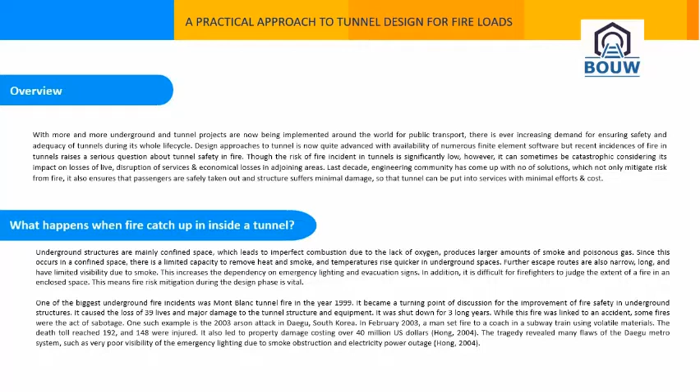The tragedy revealed many flaws of the Daegu metro system, such as very poor visibility of the emergency lighting due to smoke obstruction and electricity power outage (Hong, 2004).

Behavior of concrete under fire. The behavior of concrete under fire exposure is determined by the properties of the aggregates and the cement matrix, its moisture content, pore structure, and loading, in addition to the rate of heating and maximum temperature attained. When heat penetrates concrete, it results in desorption of moisture in the outer layer.

Most of the water vapor formed will flow towards the cold interior of the concrete and be reabsorbed in the voids. As this process continues with heating and once the saturated layer cannot move fast enough through the pore structure, it is overtaken by the advancing heat front, which causes the water to evaporate at the interface, and due to the rapid rise in temperature and the restrained expansion, the vapor pressure rises rapidly.

When the pressure starts pushing outer layers, spalling of concrete happens. The reason behind this spalling can be attributed to the tensile strength of concrete subjected to vapor pressure exerted on the concrete. It is observed that concrete with high strength and low permeability is more prone to this mode of failure, particularly if it has a high internal moisture content.

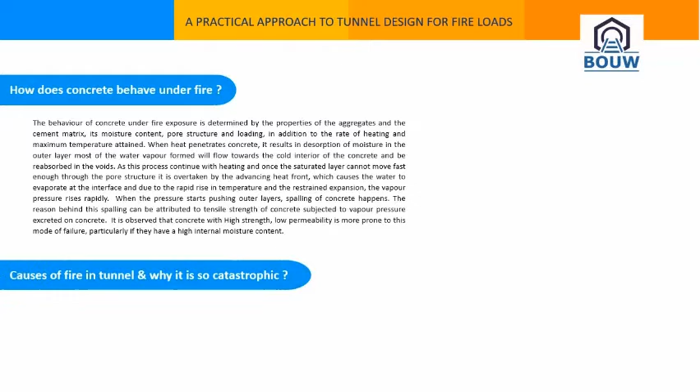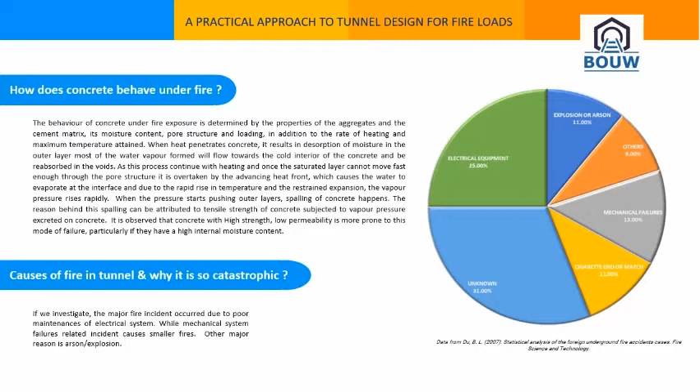Causes of fire in tunnels. If we investigate, the major fire incidents occurred due to poor maintenance of electrical systems, while mechanical system failure related incidents cause smaller fires. Another major reason is arson/explosion. Data from Du, B. L., 2007, Statistical analysis of the foreign underground fire accident cases, Fire Science and Technology. Breakthrough in design.

In the last decade worldwide, the engineering community has made significant achievements in developing advanced and sophisticated liner design along with reliable fireproofing systems and use of artificial intelligence. At the onset, the whole activity was targeted to provide passengers with safe, smoke-free egress/escape tunnels, thus reducing loss of lives, and ensuring that the structure can still withstand major service loads during and after a fire.

Better quality control to minimize explosive concrete spalling and detrimental impacts of fires to the tunnel main structural components. Ensure that any damage is reparable, so the facility can return to normal operations as rapidly as possible, thus minimizing economic impacts. Application of AI to develop systems which can detect fire early in real time and reduce response time, ensuring safety and reducing losses of both lives and economy.

The minimum legislative level of safety for structural fire design aims to provide an acceptable risk associated with the safety of tunnel, firefighters, and people in the proximity of it. It is the owner's acceptable risk depending on tunnel size, clearance envelope, provisions for facility systems, supporting equipment, emergency egress layout, as well as the entire adopted emergency egress scenario. All will be determined based on the initial classification of the facility.

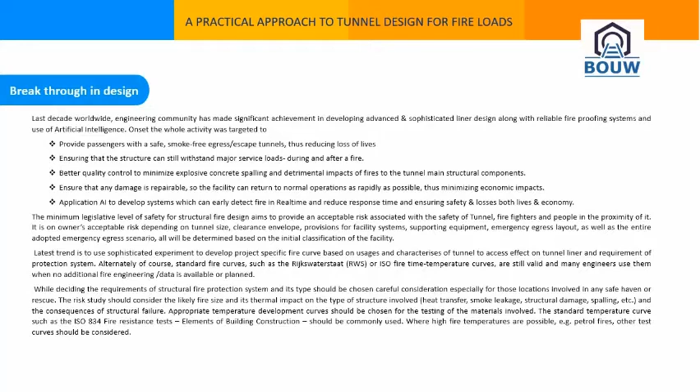Appropriate temperature development curves should be chosen for the testing of the materials involved. The standard temperature curve such as the ISO 834 fire resistance tests on elements of building construction should be commonly used. Where high fire temperatures are possible, e.g. petrol fires, other test curves should be considered. Choosing appropriate fire time temperature curves.

Recent trends in large projects are to carry out project-specific assessment. Customized fire curves are gradually considered as the industry norm, with an increased focus on an actual fire event that a tunnel should be designed for, based on the type of vehicles and their combustibles that are allowed into the tunnel, like rail/metro or roads. As there are differences in causing fire, either by combustion or electrical or any other reasons. Once we identify the exposure and risk associated, a customized curve provides the best fire loads the tunnel shall be designed for.

Now, Eurocodes provide advanced calculation methods and guidance, and using performance-based engineering allows for a more prudent approach to fire protection, which is generally based on detailed quantitative and qualitative risk assessment for a fire event in a tunnel. The EUREKA-curve proposed a number of fire time temperature curves for a variety of applications, ranging from the ISO 834, 1975, cellulosic curve to the RWS curve, figure.

The selection of an appropriate time temperature curve and the relevant fire duration is an important consideration, which should be driven by a risk assessment, in cases where no design standards apply. Once a suitable fire time temperature curve has been selected, the likely effects of such a fire on the tunnel's structure should be ascertained.

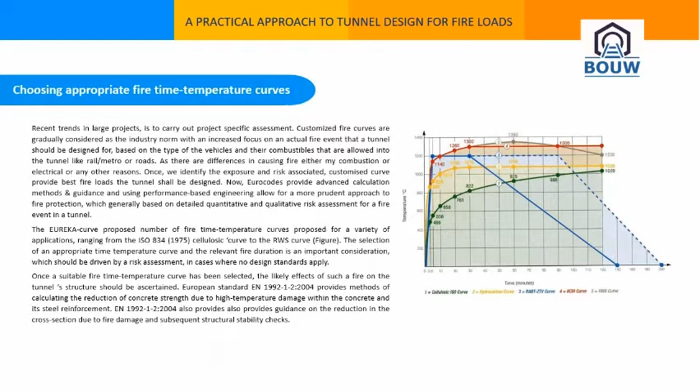Active fire suppression. Suppression systems are now viewed more favorably than before, in terms of their asset protection and life safety benefits. The key issue is to control any fire spread by early application of water at the affected tunnel locations. NFPA 502, 2008, deals with water-based fixed firefighting systems in road tunnels.

It concludes that such systems should be considered where an engineering analysis demonstrates that the level of safety can be equal to or exceeded by the use of water-based fixed firefighting systems and is a part of an integrated approach to the management of safety.

Here, engineers quantify heat transfer from hot gases into the liner and calculate temperature distribution within structural elements over time, using sophisticated finite element modeling that accounts for changes of the tunnel liner material properties, concrete and steel, due to heat exposure. The analyses assess the liner's spalling potential, its load-carrying capabilities, and its potential deflection.

On completion of these analyses, it may be found that a sacrificial concrete layer is adequate to protect the tunnel liner and that the temperatures in the reinforcement and the concrete remain below 250 C and 380 C, respectively, as required by NFPA. In such cases, the structure is stable and not significantly affected, and no fireproofing protection system is required.

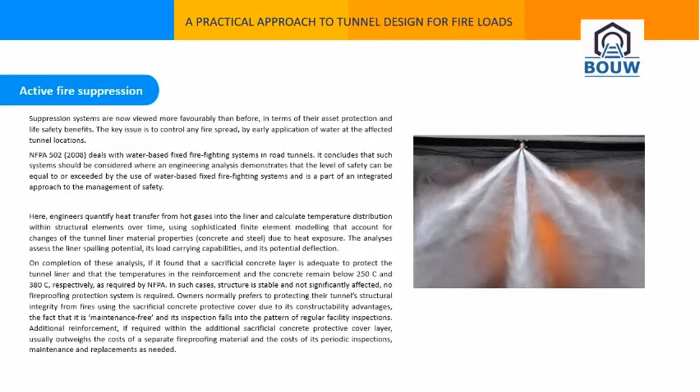Polypropylene fibers. An effective measure to control spalling is the use of micromonofilament polypropylene fibers added to the concrete mix. The polypropylene fibers melt at 160 degrees and thereby increase the porosity of the concrete, enabling the dissipation of pore pressures. Consequently, no or very limited spalling occurs.

Following a fire event, a risk assessment should be carried out to determine appropriate measures to be taken where the fibers have melted. The assessment should include at the very least consideration of strength reduction of the heat-affected concrete and required structural capacity, permeability of the remaining concrete and the impact this may have on corrosion or other deterioration mechanisms, and risk of concrete spalling over time. The associated overall repair costs are relatively high. In addition, the tunnel cannot remain operational during the repair works.

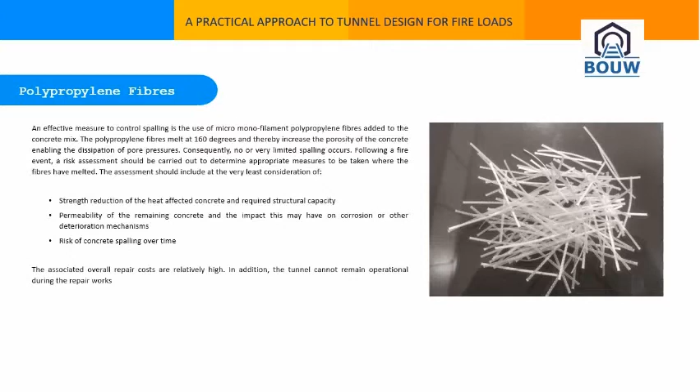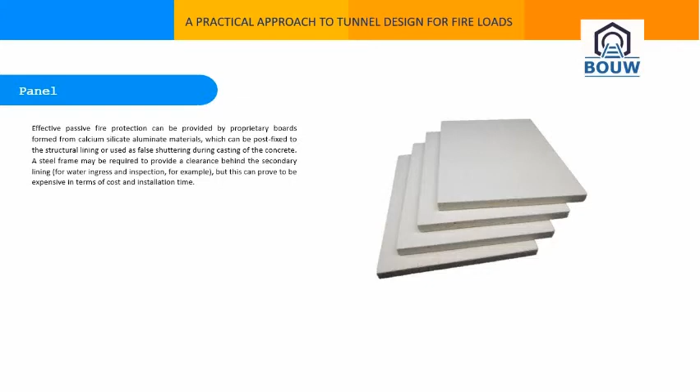Panels. Effective passive fire protection can be provided by proprietary boards formed from calcium silicate aluminate materials, which can be post-fixed to the structural lining or used as false shuttering during casting of the concrete. A steel frame may be required to provide a clearance behind the secondary lining, for water ingress and inspection, for example, but this can prove to be expensive in terms of cost and installation time.

Cementitious coatings. Passive fire protection can also be provided by applying a cementitious coating. The materials primarily consist of Portland cement with fine aggregates and can be applied in varying thicknesses ranging between 20 mm and 40 mm. The required thickness depends on the design fire load and the required temperature at the interface between the barrier and the concrete of the structural lining.

The coating can be designed such that the temperatures at the face of the structural lining do not exceed 350 degrees Celsius, which will prevent spalling and significant changes in the mechanical properties of the concrete. A small diameter coated reinforcement mesh might be required to fix the coating to the structural lining. Protective coating, which is spray applied on the structural lining, undergoes chemical changes during the fire event. Therefore, it can only withstand a single fire, after which it has to be removed and replaced. The structural concrete is deemed to remain undamaged.

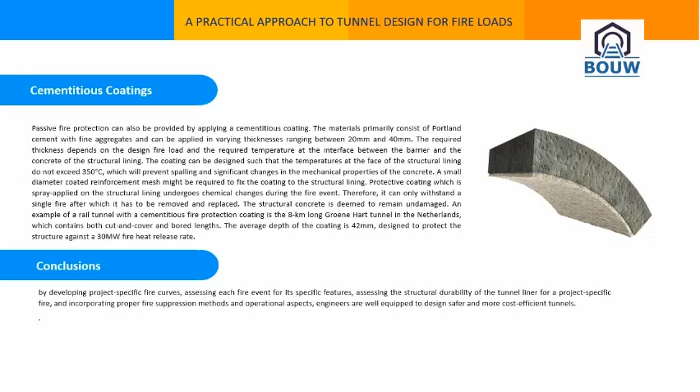An example of a rail tunnel with a cementitious fire protection coating is the 8 km long Groene Hart tunnel in the Netherlands, which contains both cut and cover and bored lengths. The average depth of the coating is 42 mm, designed to protect the structure against a 30 MW fire heat release rate.

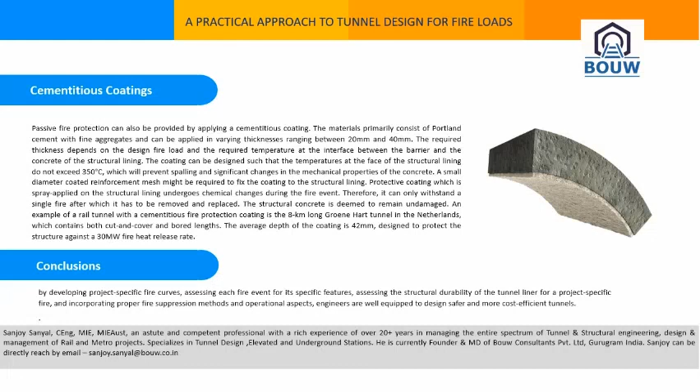Conclusion. By developing project-specific fire curves, assessing each fire event for its specific features, assessing the structural durability of the tunnel liner for a project-specific fire, and incorporating proper fire suppression methods and operational aspects, engineers are well equipped to design safer and more cost-efficient tunnels.